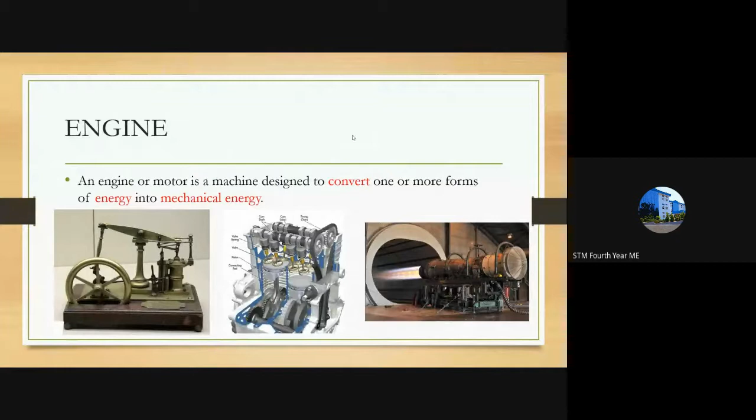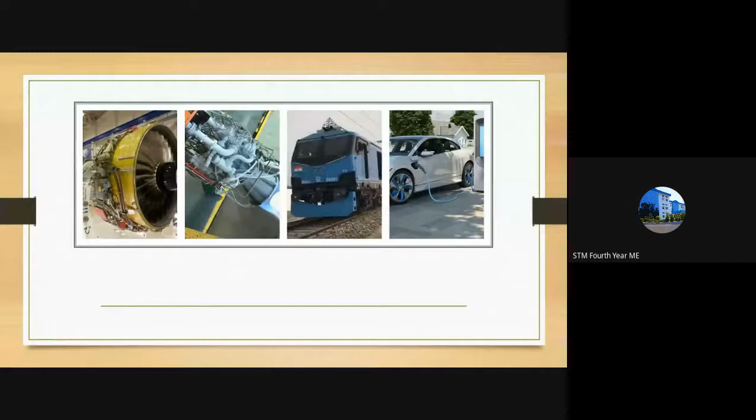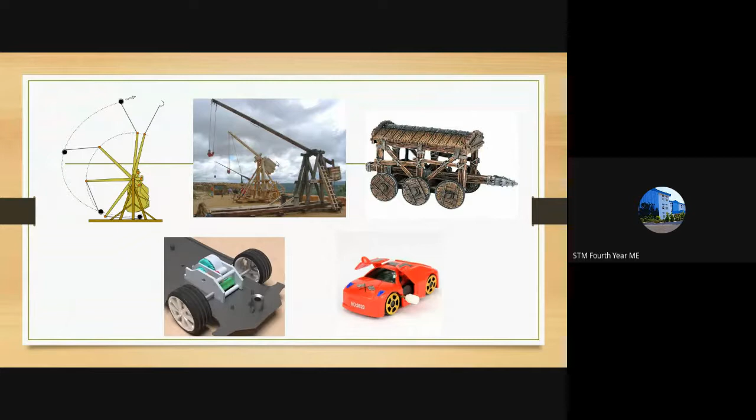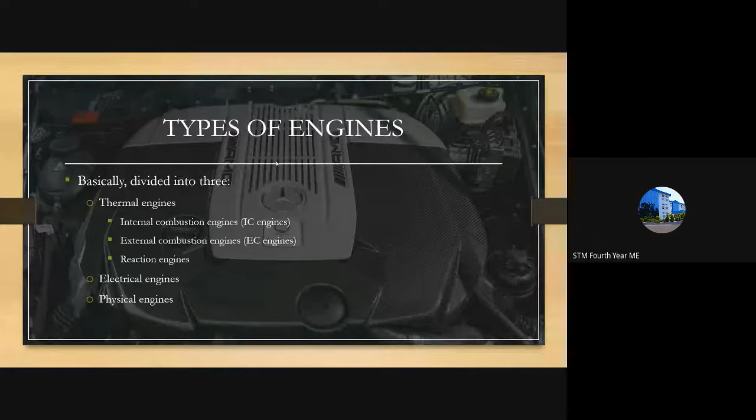So we'll discuss what are the types of engines. Basically, engines are divided into three types: thermal engines, electrical engines, and physical engines. Thermal engines are subdivided into internal combustion engines, external combustion engines, and reaction engines.

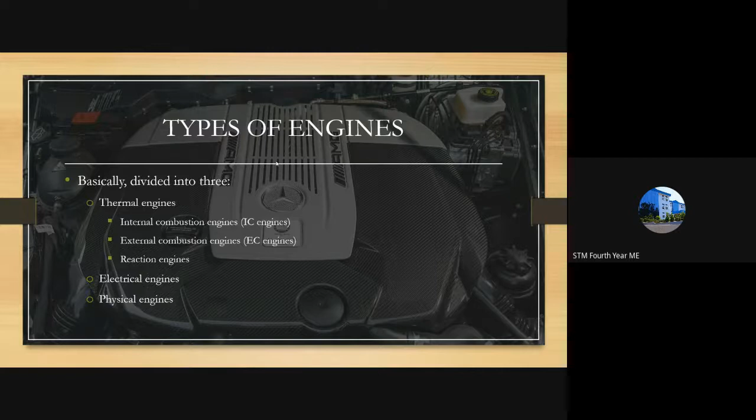I'll give you a brief description. Basically, thermal engines are known as engines that convert heat energy into mechanical energy. They convert the heat generated due to combustion, which means burning of fuel. While we burn, we get heat energy, and that heat energy is converted into mechanical energy. Such engines are called thermal engines.

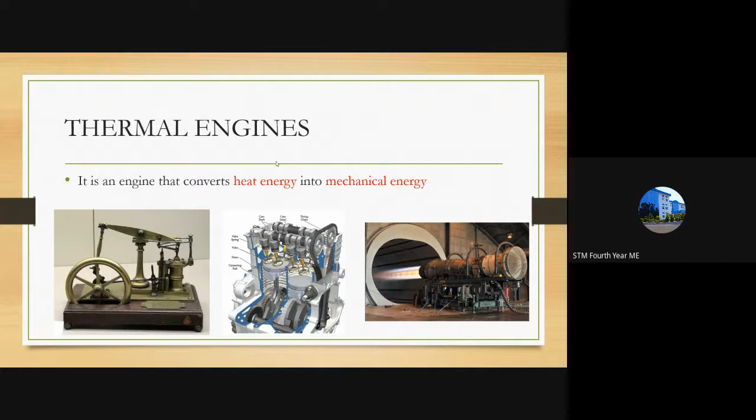Before I show you three pictures, they are all thermal engines. A steam engine is a thermal engine, an IC engine is a thermal engine, and a rocket engine is also a thermal engine. We use the heat energy for doing mechanical work. Rocket engines and aeroplane engines are also part of thermal engines.

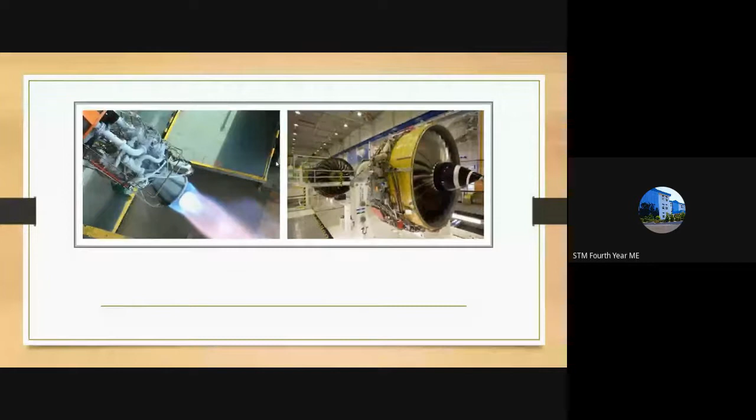Then, what is an IC engine? IC engines are also known as internal combustion engines. The name suggests it: an internal combustion engine means the combustion takes place inside the vehicle or automobile. Inside an automobile, the combustion takes place. Such engines are called internal combustion engines or IC engines.

Inside the combustion chamber, heat energy is produced. This heat energy is in the form of an explosion, and that explosion propels the piston or any other mechanical part to do mechanical work.

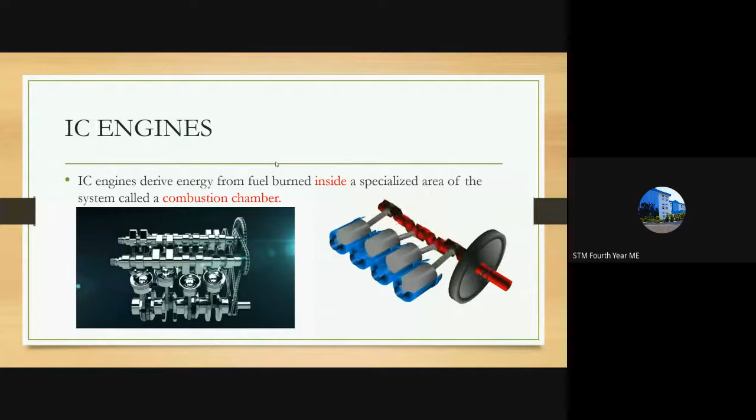That energy then gives us a rotational motion, which is transferred to the wheels. So, for an IC engine, this is the basic working.

So in the working process of an IC engine, we have the induction or injection of a fuel air mixture into the combustion chamber. First procedure, we have to inject a fuel air mixture. This is the basic working, just to know what it is.

So the fuel air mixture enters the cylinder, then after entering, the mixture is compressed. The compression of the mixture is done.

Then we give an ignition by spark plug or compression, and due to that the fuel gets ignited or explodes. By the explosion, the piston is thrown downwards, thereby giving us the work.

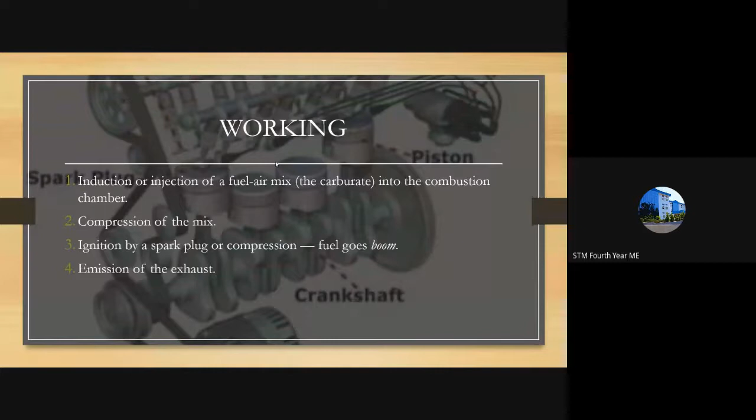And the last procedure is the emission of exhaust that we observe in the silencer of a vehicle. The exhaust has to be removed from the combustion chamber. So these are the four processes that take place inside the combustion chamber.

Next are EC engines or external combustion engines. By the name itself, you know that combustion takes place externally from the automobile or the locomotive. Steam engines are the common examples of an EC engine.

There is another engine called a Stirling engine. It's almost the same working as a steam engine, but it is also an external combustion engine wherein the combustion of the working fluid occurs outside the vehicle.

So you can see that in a steam engine, the flame is given to the water. The water then boils, and while boiling, steam is generated, and due to the high pressure of steam generated, the piston moves to and fro, giving a rotational motion to the flywheel or the wheel, thereby propelling the vehicle.

The combustion takes place outside, not inside the cylinder. A piston is given, but the piston is moving due to the steam pressure. The pressure of the steam gives mechanical energy work to the piston, thereby rotating the flywheel.

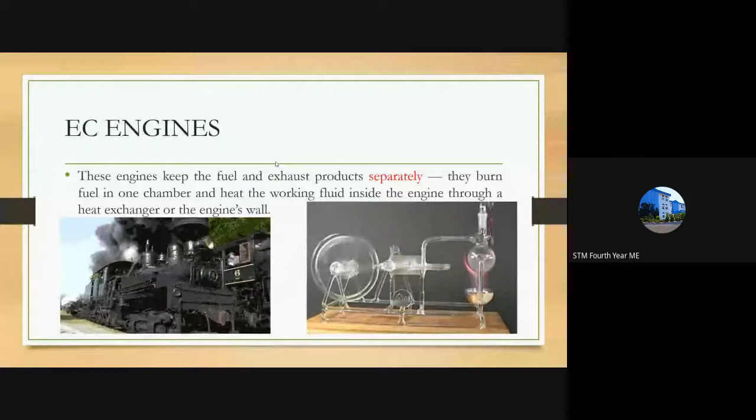Next engines are reaction engines. A reaction engine is nothing but a rocket engine or a jet engine. Here what we do is combust the fuel and produce a jet or a propellant that gives us the to and fro motion. We'll be given a thrust motion.

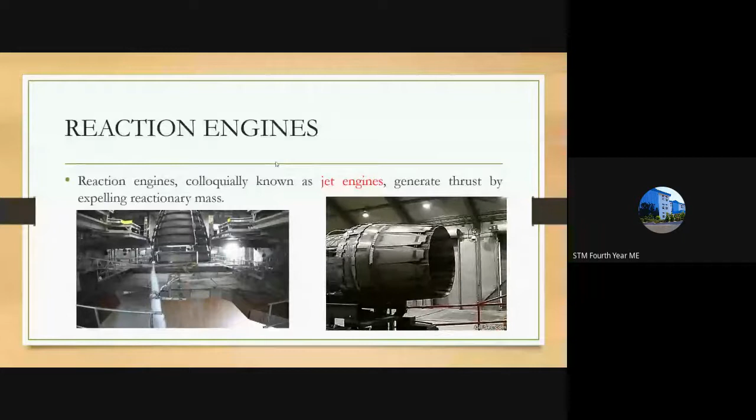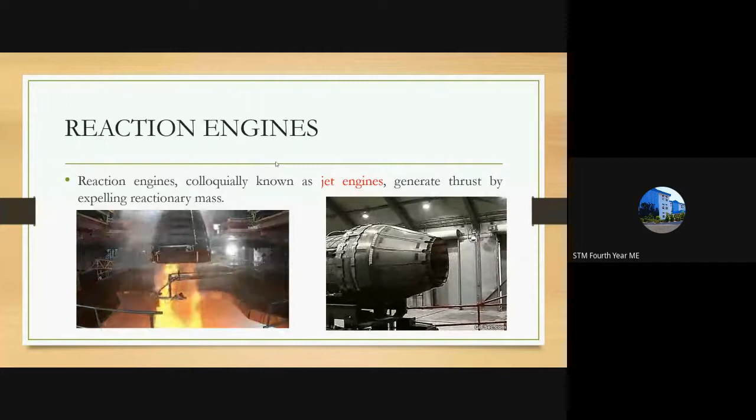We'll be propelled in the forward direction against the burning of the fuel. The fuel is burned and thrust outwards, giving us the thrust in the forward direction. Such engines are known as reaction engines. Common examples are jet engines and rocket engines.

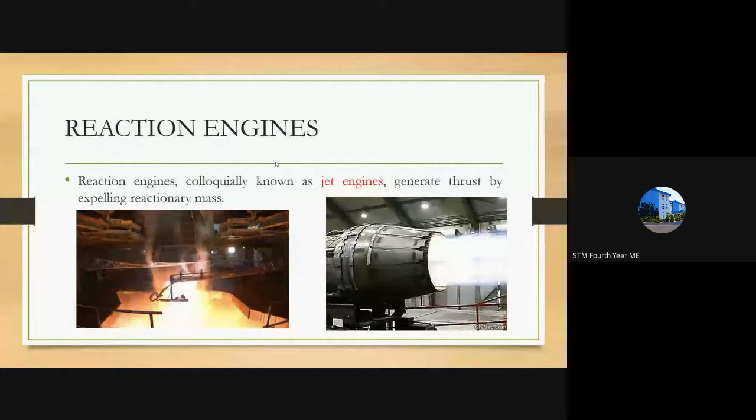Next is an electrical engine. These engines convert electrical energy into mechanical motion. Common examples are electrical cars and electrical locomotives.

So they convert the electrical energy stored either in the form of a battery or given as power through power lines, and that energy is converted into mechanical motion of the vehicle or the locomotive. Such engines are known as electrical engines.

Next are physical engines. I have shown you a few examples. These engines use the stored mechanical energy to function.

Examples are trebuchets and battering rams, which you have seen in movies, used in old times for war purposes. They use physical laws, that is, they have a spring or a weight which propels the projectile to move in the forward direction. These energies are stored in the form of potential energy.

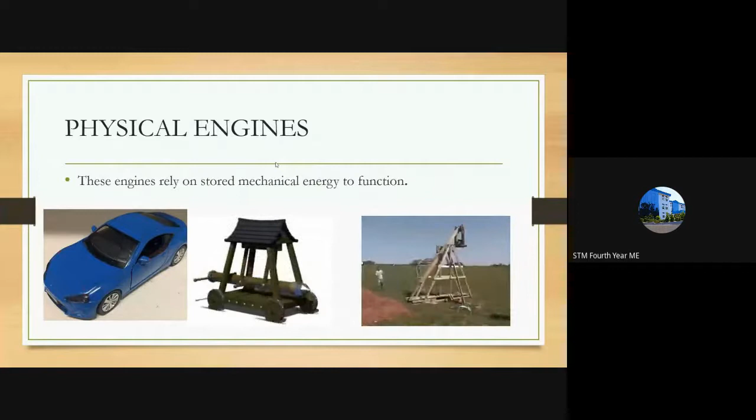Now we will see what are the parts of the IC engine. So we have to learn about internal combustion engines. There are a few parts in the IC engine, and basically these parts can be divided into three categories.

When you take an engine, at the topmost side we have the engine head. Then in the middle section we have the engine block, and last we have the oil sump. So basically it is divided into three parts: engine head, engine block, and oil sump.

So what are the parts found in the engine head? In an engine head you have the head gasket, intake and exhaust port, inlet and exhaust valves, spark plug or fuel injector, and camshaft. These are the basic parts of an engine head.

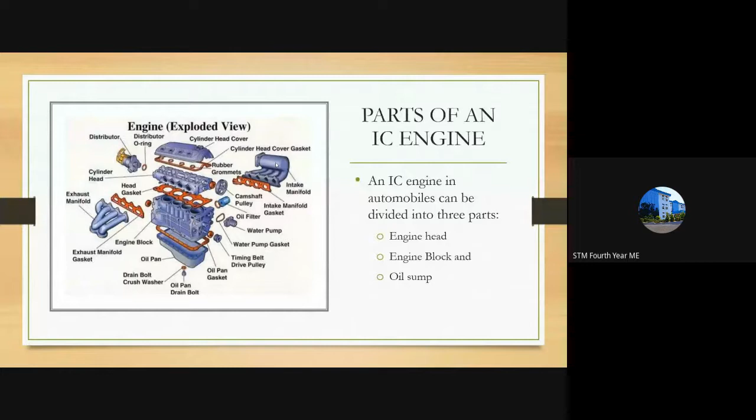Next is a spark plug or fuel injector. In case of petrol engines, a spark plug is given which provides a spark for igniting the air fuel mixture inside the cylinder, thereby giving the power required for the mechanical work to be done.

Then comes the camshaft. The camshaft controls the opening and closing of valves, provided for both the inlet valve and exhaust valve.

Okay, what is your time for this hour? Am I audible? Yes, sir. Okay, what is your time for this hour? I think it's 12:10, right? Yes, sir, yes, sir, yes, sir.